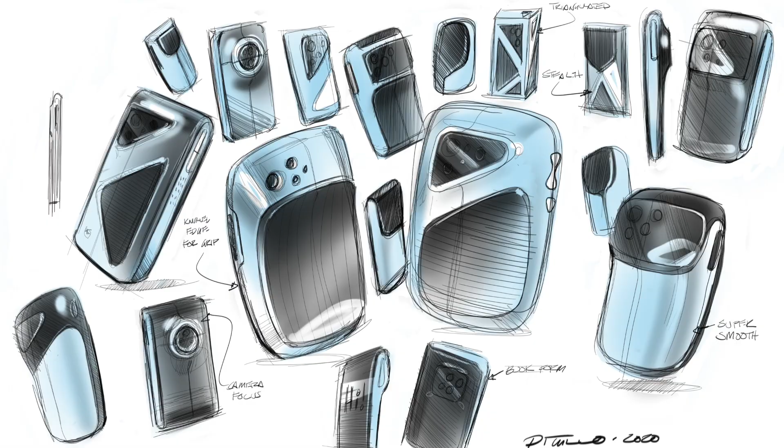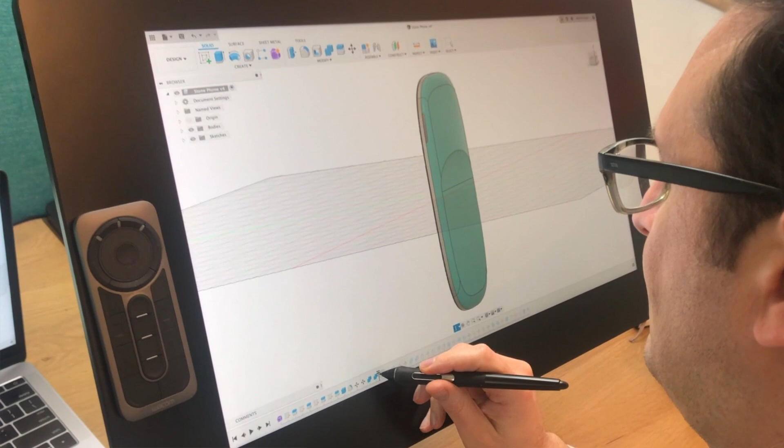In today's episode, I'm going to be taking one of the concepts from the thumbnail sheet that I developed in the last episode and bringing it into Autodesk Fusion 360 to refine. I'll be using Fusion 360 on a Mac along with a Wacom Cintiq Pro monitor, which is a really fun way to interact with CAD. I find it helps me find the forms a little bit better.

One of the many things I love about Fusion is that it combines a lot of different tools that you would typically see in different CAD platforms. So while I'm starting this model, I'm actually going to be opening up the form tool so I can get a really nice soft form.

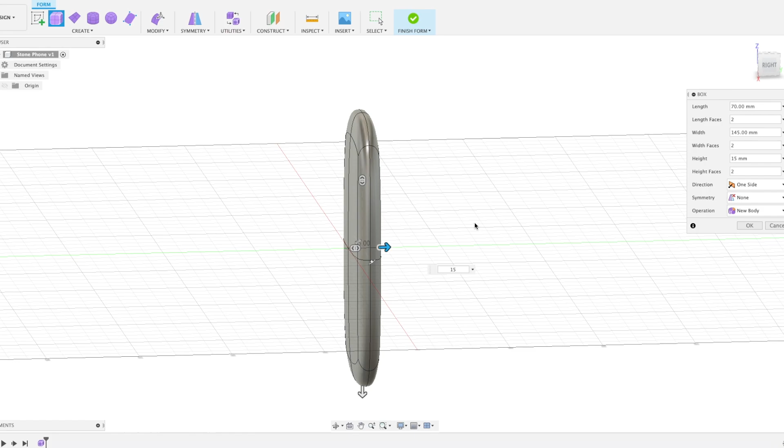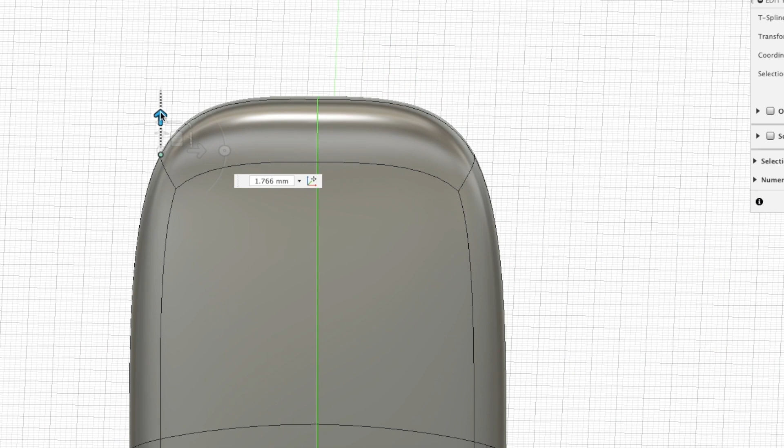One of the things I want to do in this smartphone concept is make it feel a little bit softer, a little more ergonomic. In the last episode, I talked about how a lot of smartphones just feel like these anonymous bricks. So I want to have this soft form that recognizes the fact that it's supposed to be in our hands, it's supposed to go in our pockets, and it should just feel right. I'm kind of nicknaming this concept the river rock, and I want to have that kind of sense to it.

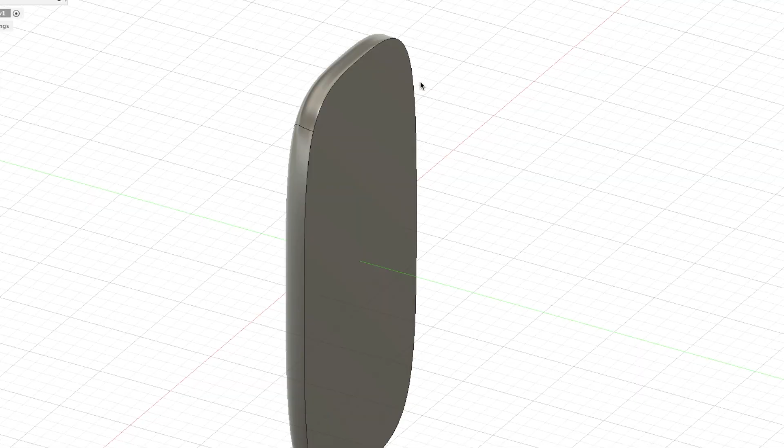Once I have my form all sewn up, I'll export that back over into the model workspace, where now I could start really tweaking it and dividing it. So I'm actually going to slice off part of it here so that I can get a flat surface, which will be my screen. And then I'm going to slice a secondary band that I'm going to make a really nice bezel. One of the things I want to do with this bezel is make it a really nice kind of knurled area so that it has a nice texture to it.

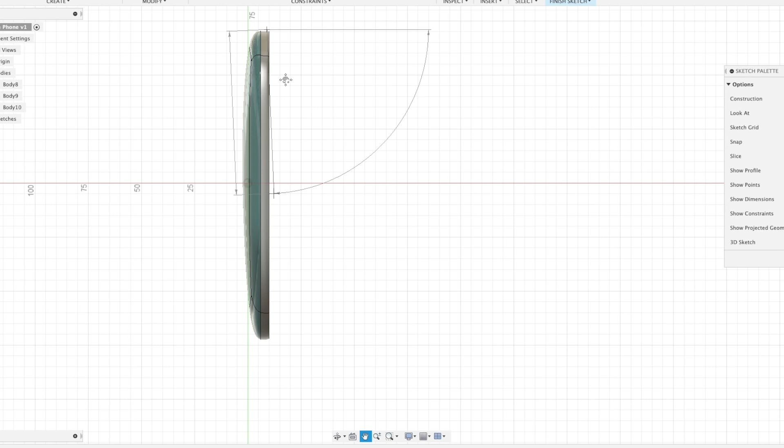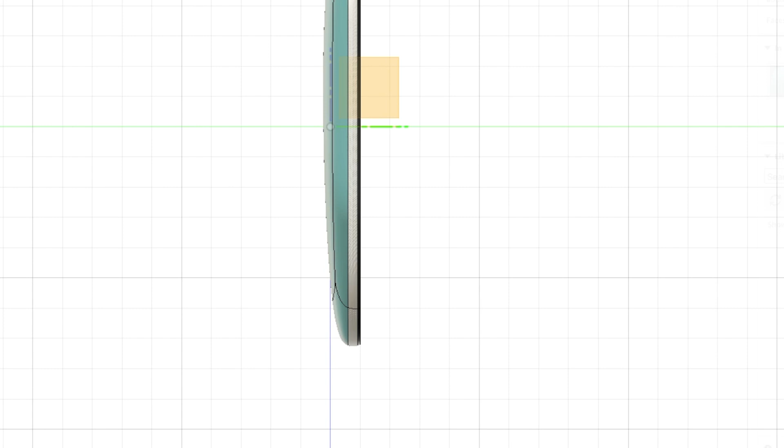Knurling is that kind of diamond texture that you often see in metal parts, especially in things like the crown of a watch where you change the hour and minutes. Those little textures feel, one, really tactile, two, it's a texture that we're used to feeling with our fingertips, and three, hopefully make this thing a little bit less slippery. I'd like to make this phone robust enough so that you didn't feel like you needed to have a case with it. So having these crisp edges and textures are really going to help with that.

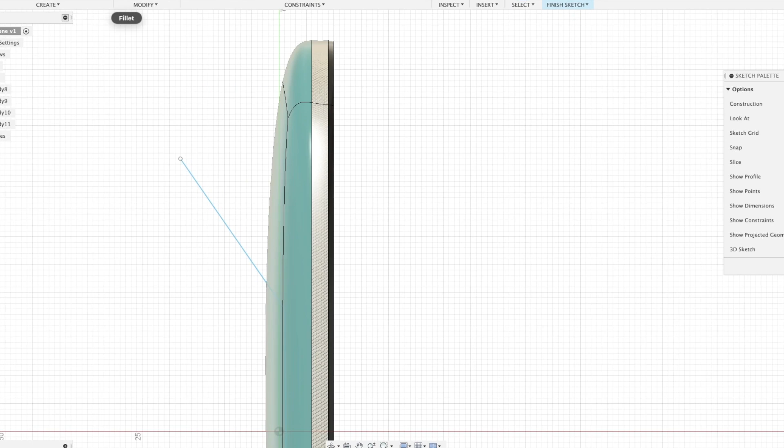As we're getting over to the back side of the phone, I really want to have this nice, crisp, sculptural line. That line is going to scoop out so that we get a natural kind of bump out for the camera. Instead of designing a phone and then adding a brick on top of it to accommodate the camera, I want to really make it feel like it was designed for this. So there'll still be this kind of profile that bumps out, but it'll feel much more integrated, and I think it'll just have a much nicer feel.

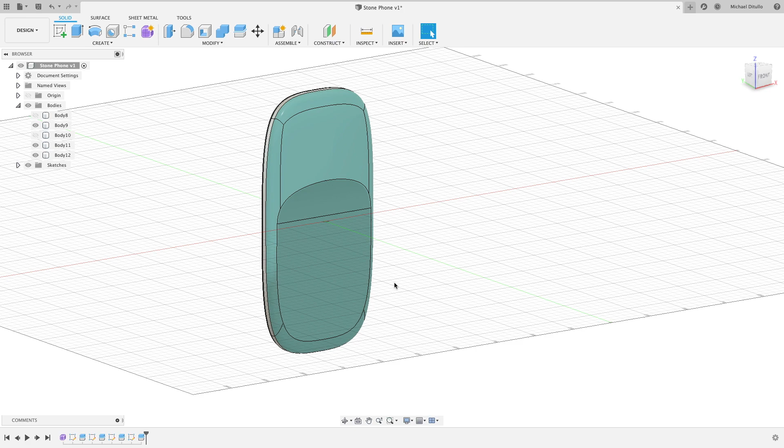In reality, we're talking about the phone's about 70 millimeters by 145 millimeters tall. The camera bump's only 3 millimeters. The next thing I'm going to do is work on a lens that covers up all the different camera lenses. So this phone, I'm going to show 3 camera lenses and a really large flash, and I want to do that again in a really unique way.

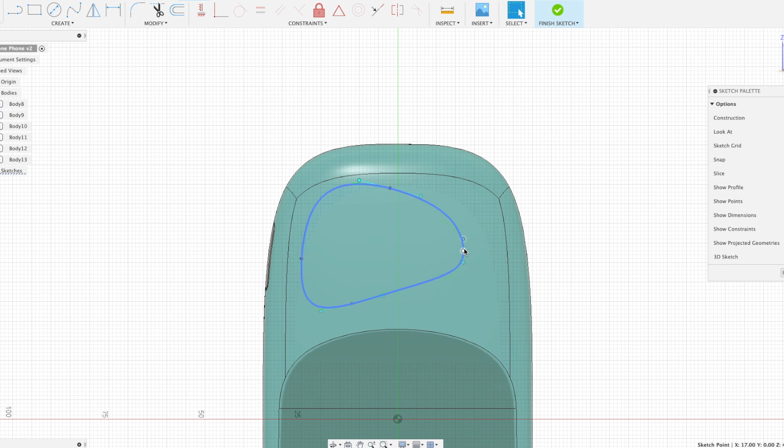So I worked up this really soft guitar pick shape that is really fun, doesn't feel quite so man-made or artificial. It feels much more organic, and again, this feels like more of a complete object.

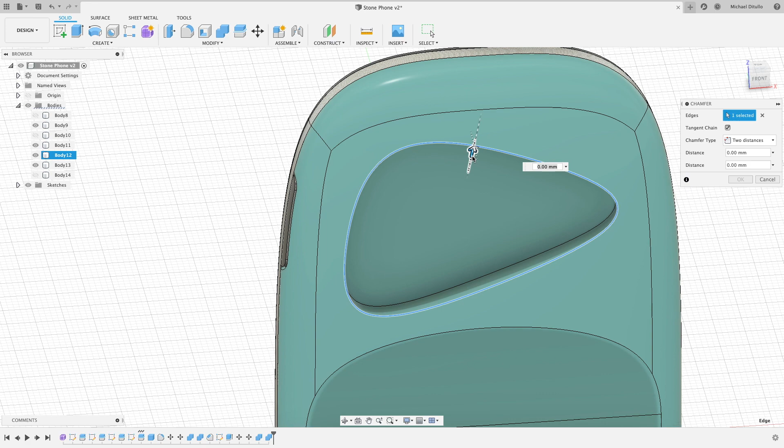I really love a lot of subtle surface development. I feel like subtle surfacing makes the difference between a really well-developed object and something that feels maybe a little bit too generic. So around this camera lens, I'm going to put this kind of off-angle chamfer that's just going to give your finger like a nice ridge around that area. You'll really feel it, even though it'll only be very subtle. It's only going to go 1 millimeter deep and maybe 3 millimeters wide, something like that.

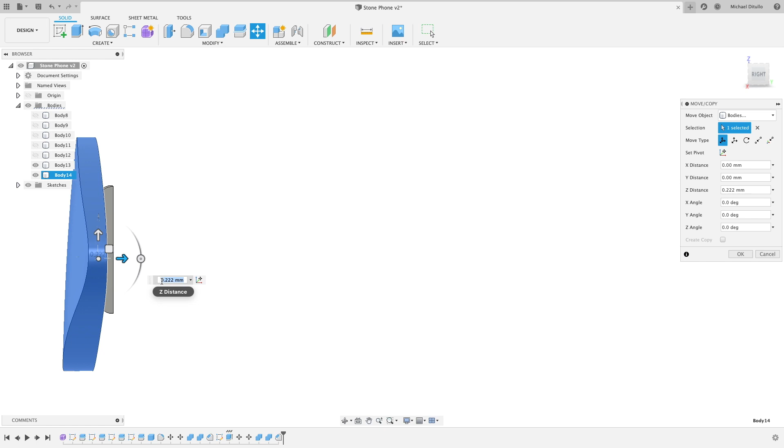But I think the interesting thing about having details like this is, one, it gives us another area to break the textures, and two, it really catches the light. So as we start to render this up in the next episode, all these little things will really show off, and I think will make for a very interesting product.

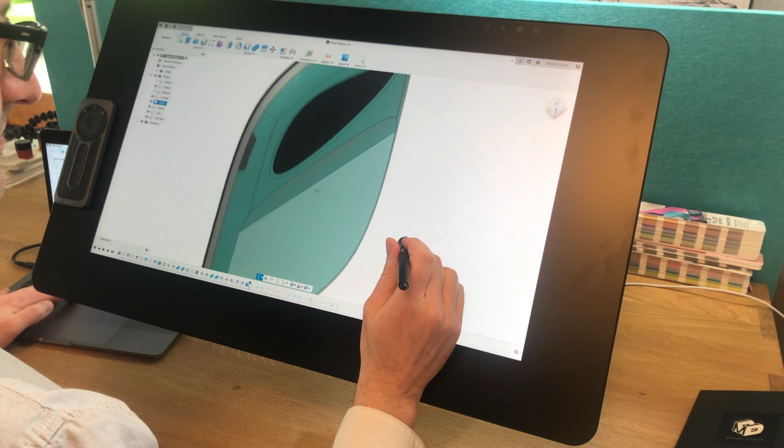Typically when I do these, we would be working up 3 or 4 concepts at a time. We'd be pulling in internals from the client if we could get a battery and a PCB and anything that we could build the CAD around to make sure that what we're building is buildable, at least to the best of our knowledge at this early stage. But for this exercise, we're playing kind of fast and loose and just developing a concept quickly.

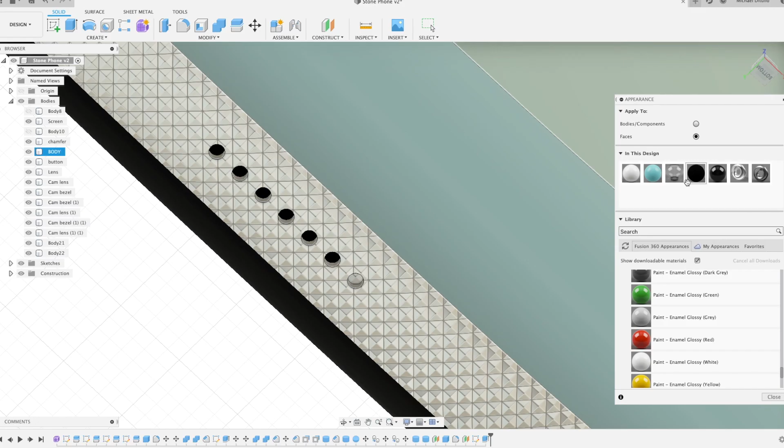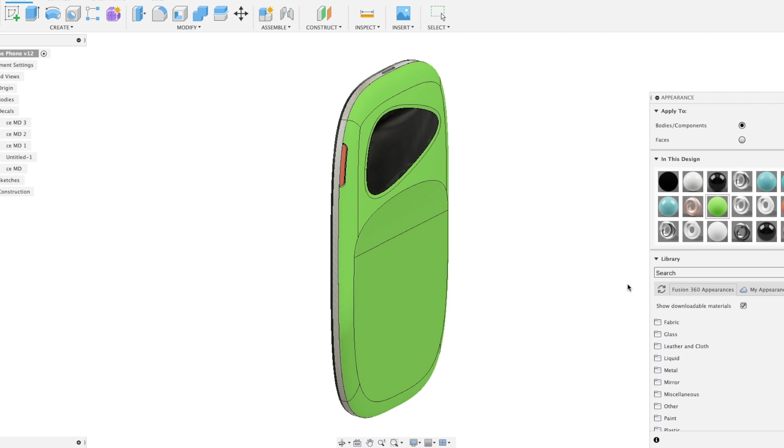One of the other things I love about Fusion is that in normal times, I travel a lot and internationally, always going to work with clients. I love that in Fusion, all of the files are stored in the cloud. So if one of my CAD modelers is working on something and saves it, I can get an instant update and log in to see exactly what they've done. I could share files with clients really easily because I can send them spinnable links. I really love that capability of Fusion. It's just a little bit different than the other CAD packages we've used.

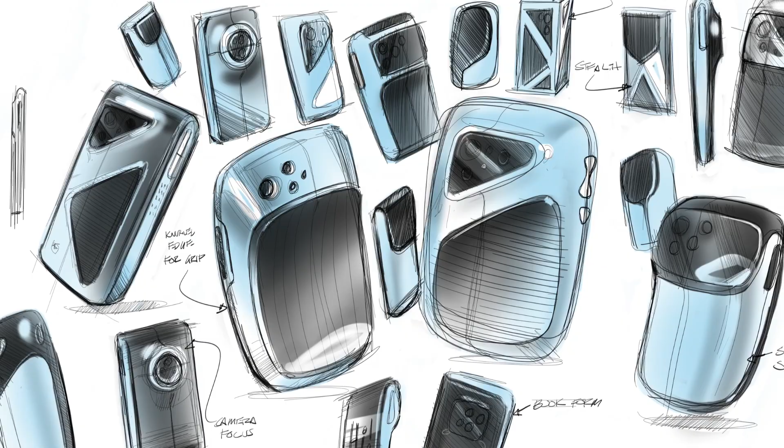I hope you enjoyed this really quick look at how I develop a concept from a really rough thumbnail into a quick model so we can get a sense of what the design is going to look like in 3D. In the next episode, I'll be showing you how I take this quick 3D model and render it up so it becomes a client-facing deliverable. I hope you guys enjoyed this episode, and I'll see you next time.